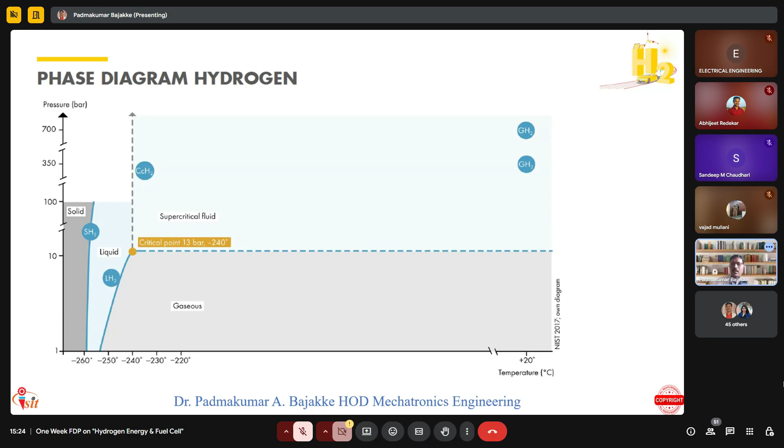That critical point is at 13 bar and minus 240 degree Celsius. With this you might have got a fair idea of at what temperature and pressure we can store hydrogen. This slide correlates with the storage capacity of hydrogen at different ambient temperatures, and storage also has a lot of challenges. To link that, my initial explanation started with this phase diagram of hydrogen.

As we know, we have n number of materials for fuel, right from petrol, diesel, biodiesel, ethanol, propane, methane, and hydrogen. Everyone is aware that the era of pure petrol and diesel has finished. Now these fuels are blended with methane and related elements. As per central government norms, we get biodiesel, which is petrol or diesel blended with methane and related groups, depending on the percentage. Still in India we could achieve blending up to only 10%. That is why those rules were made. I'll just give some basic information.

As you are all aware, post-COVID the central government imposed that BS6 vehicles be launched and come into the market. Earlier we had BS4 vehicles, with a gap of BS5 in between. So what is the actual difference between BS4 and BS6? The first strategy the central government took was to reduce emissions due to the petrol and diesel we burn in engines. If anybody has a BS6 two-wheeler, you can see what changes have been made in the technology.

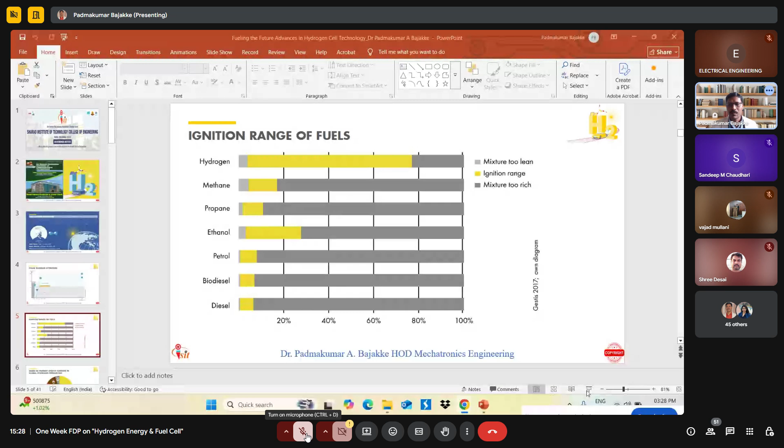Uh-huh. Hello. Yeah, sorry for the interruption.

Now the world as well as India is working on hydrogen technology, and that is the future. How to generate hydrogen from the existing materials we have is something we will discuss.

This slide relates to the ignition ranges of fuels.

Here you can find in the labeling that gray color is mixture too lean, yellow is the ignition range, and dark gray is mixture too rich, with percentages on one side of the graph at 20%, 40%, 60%, 80% and 100%. From this we can identify the ignition ranges of our existing fuels.

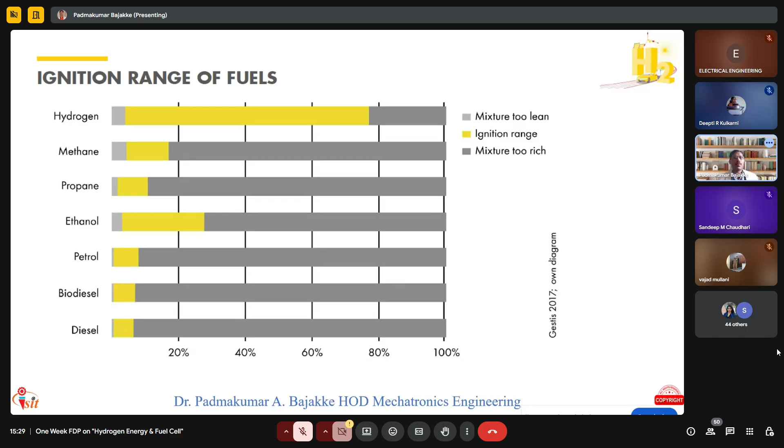Now coming to the share of primary energy carriers in global hydrogen production. In this pie chart, gas contributes 68%, oil contributes 16%, coal contributes 11%, and electricity contributes 5%. These are the primary energies required to generate hydrogen production.

Hydrogen production cannot happen by default; we have to use multiple ways, such as burning gas which helps convert water into hydrogen and oxygen molecules. Similarly, we may burn oil or burn coal, or we may use electricity. This chart represents the primary energy used in the generation of hydrogen production.

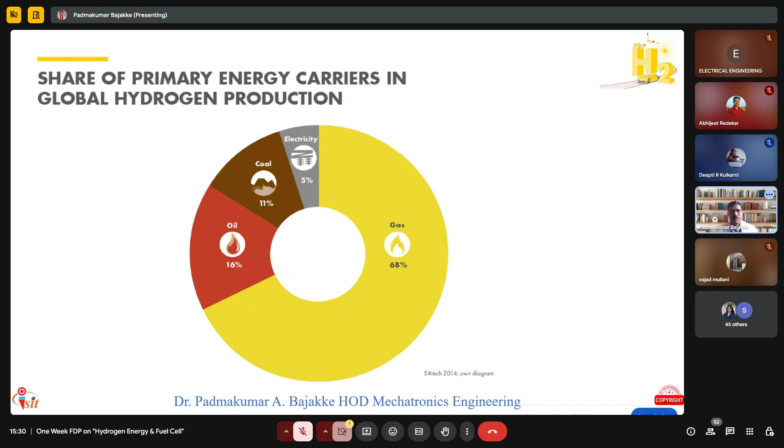Now coming to the ways or process for producing hydrogen energy. As we know, there are three types: gray hydrogen, blue hydrogen, and green hydrogen. Before 2020, the world was concentrated on gray hydrogen. After 2020, we are now in the era of generating hydrogen by blue hydrogen. After this, some countries have started their trials with green hydrogen, which may become full-fledged after 2030.

So what exactly are gray hydrogen, blue hydrogen and green hydrogen? In gray hydrogen, the primary energies we use are coal, natural gas and biomethane. After burning either of these three, it undergoes a phenomenon called reforming, which liberates a large amount of carbon dioxide. The carbon footprint is very high with gray hydrogen, which is a bad impact for the environment. Even though we are producing hydrogen, the process liberates carbon dioxide into the environment, causing the greenhouse gas effect. We cannot eliminate that.

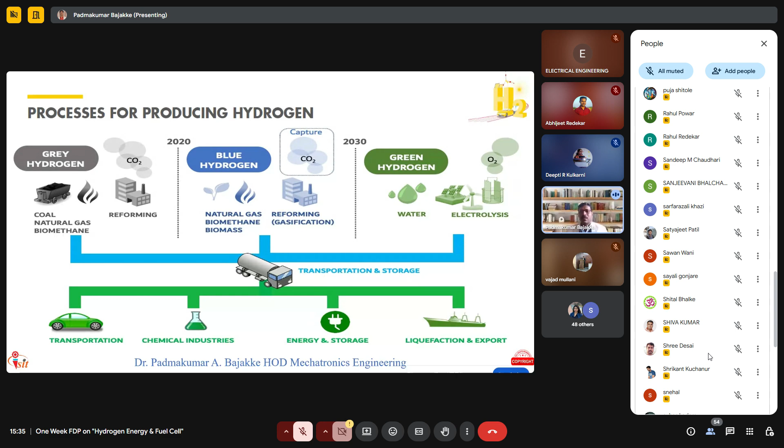Again, whatever hydrogen is generated can be used in chemical industries. A lot of chemical industries require hydrogen for their chemical operations. You might have seen hydrogen stored in a tank, which is required in some chemical industries. Again, there's energy storage - the hydrogen can be stored in the form of energy, which is nothing but fuel cells.

Next, liquefaction and export. This is the biggest challenge - how to transport hydrogen gas to other countries. That is why liquefaction is required. Storing hydrogen in gaseous form is quite dangerous. Exporting in heavy quantity goes through sea routes, which are very rich in salt content. Anything stored in high pressure, cryogenic temperature, or high temperature is very dangerous to carry through ships or sea routes. That is one of the biggest challenges of how to store it, which we will discuss again in future slides.

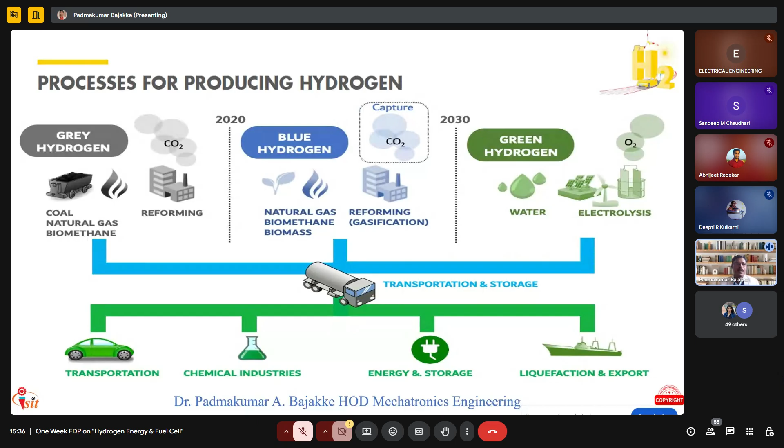Now coming to the processes for producing hydrogen, as we discussed in the earlier slide, I will elaborate on the same thing here. First you can see the primary energies, then secondary energy, conversion, then the intermediate or intermediary product, and the final energy carrier.

Now solar wind is used directly as electricity that undergoes electrolysis. So this is an example of green energy, or producing hydrogen through green energy. Here we are using solar or wind as primary sources. Whatever electricity is generated, we use as secondary energy for the process called electrolysis, to split water molecules into hydrogen and oxygen. So the final output here, we don't have any intermediate product. We directly get, after electrolysis, hydrogen and separated out oxygen molecules.

Then next we have algae from sunlight. It will undergo biochemical conversion, and again it will give an intermediate component called syngas. From the syngas, it will go through the process and give us the final output as hydrogen.

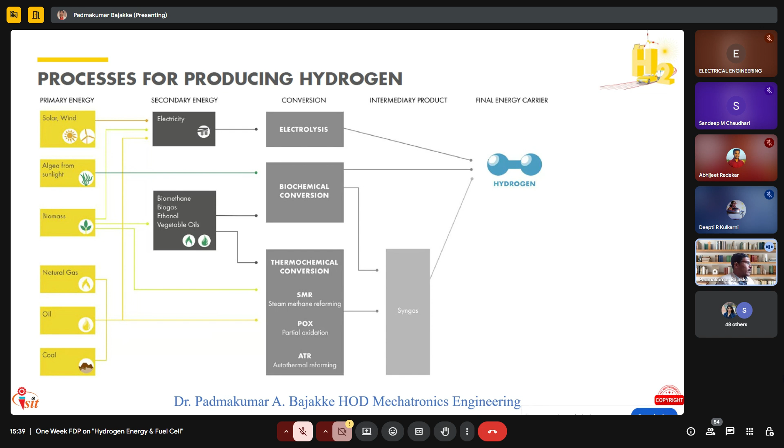Now we'll focus more on the electrolysis process, because the world is moving towards green energy, or the generation of hydrogen through green sources. As discussed in an earlier slide, one of the methods is electrolysis.

As we studied in basic chemistry, the electrolysis process has a bath, here nothing but water, and we have two electrodes, anode and cathode, dipped into the solution, with current supply given. Once the bath is processed for electrolysis, it separates out the oxygen molecules and the hydrogen molecules.

Whatever separated out oxygen and hydrogen molecules we get, we can utilize. Oxygen can be readily liberated, diverted to the atmosphere, and whatever liberated hydrogen there is, it can be stored in multiple ways.

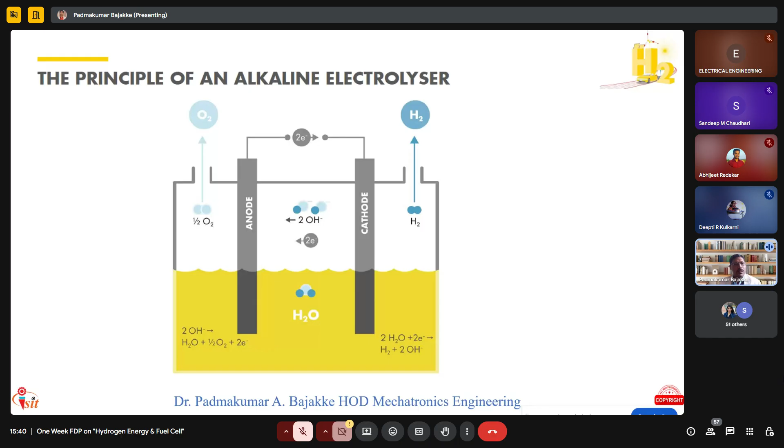Just as we have petrol pumps in our regions, in future we will get hydrogen fueling centers also. As we nowadays have battery charging stations, in a similar way in future we will also get hydrogen refilling centers.

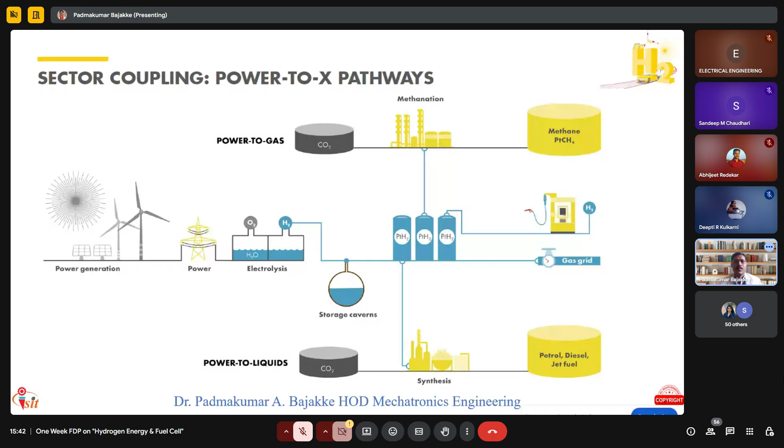Now coming to the energy input for hydrogen supply: how much energy input has to be given for the generation of hydrogen, measured in megajoule per megajoule of hydrogen generated. On the x-axis we have multiple combinations, starting with EU gas mix reforming, where you can see the labels: renewable, nuclear, and fossil. In the first one, more fossil fuel is used, a small content of nuclear, and very little renewable energy.

Then in the next one we have biogas mix reforming. Here fossil fuel use has been reduced quite a bit compared to the earlier one. Nuclear is present, and the use of renewable energy is also increased.

Then coming to LNG reforming, liquid natural gas. Here again fossil fuel usage is more, nuclear is present in some proportion, and renewable energy is very less. Whereas coming to EU electricity mix electrolysis, here fossil fuel is used as a primary source, along with nuclear energy, and to some extent renewable.

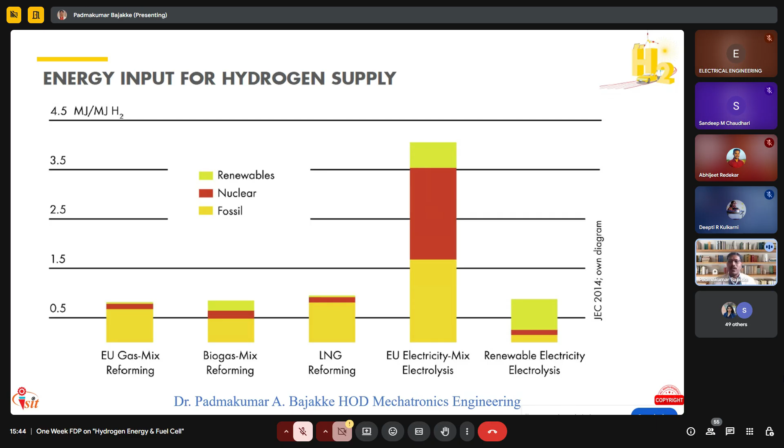In the last one, maximum we are using the renewable source of energy. Now let us understand the greenhouse gas emissions during the generation of hydrogen gas.

On the x-axis we have the same combinations of materials, and on the y-axis we have how much carbon dioxide is liberated per megajoule of hydrogen generation. Maximum it is shown up to 250 grams of carbon dioxide liberation per megajoule of hydrogen generation.

Now we'll go with the multiple combinations. The dark blue represents the centralized paths, and the light one represents decentralized paths, during generation.

First is EU gas mix reforming. For centralized hydrogen gas generation, the amount of carbon dioxide liberated is quite less, near about crossing 100 grams of carbon dioxide per megajoule of hydrogen generation. For the decentralized path, it is quite more than the centralized one, crossing somewhere around 110 or 115.

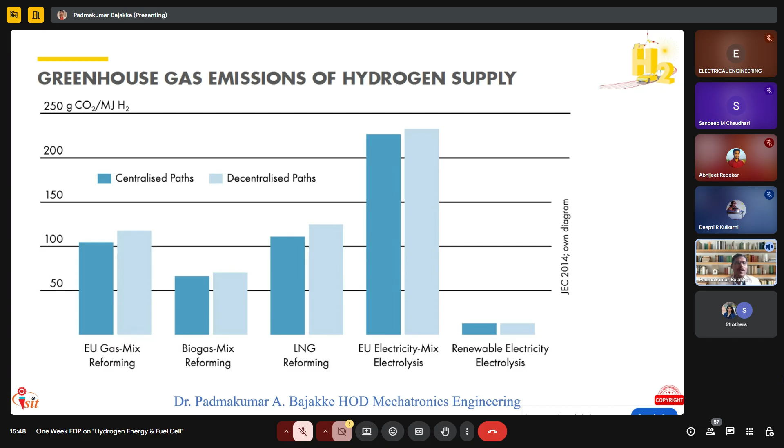These statistics are very important if you want to carry out any R&D work in this field. You should know the background, how we can generate hydrogen and how it is affecting our environment, in terms of greenhouse gas emissions.

Now coming to the production cost of hydrogen. Blue stands for current, yellow stands for projected, and the bars are error bars, showing the minimum and maximum, or you can call it standard deviation. On the y-axis we have euros per kg of hydrogen.

I repeat, it is in euros, not rupees, 12 euros per kg of hydrogen is the scale. On the other axis, we have the different methods adopted, the first being centralized gas reforming.

The current value is less than 2, and the projected value is also near to 2. There is a slight variation between both.

For decentralized gas reforming, the current value is shooting more than 4 euros per kg of hydrogen, whereas the projected value is estimated to be nearly 2.5 to 3.

With centralized electrolysis, the current value is nearly 5.8, 5.9, near to 6, and the projected value is nearly 4.2 or 4.3.

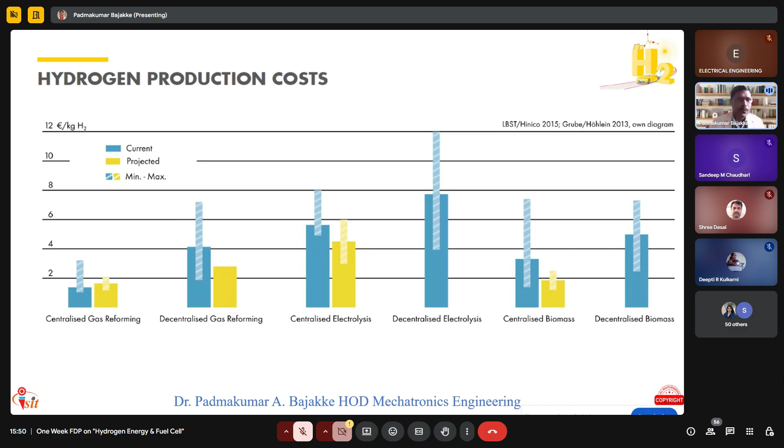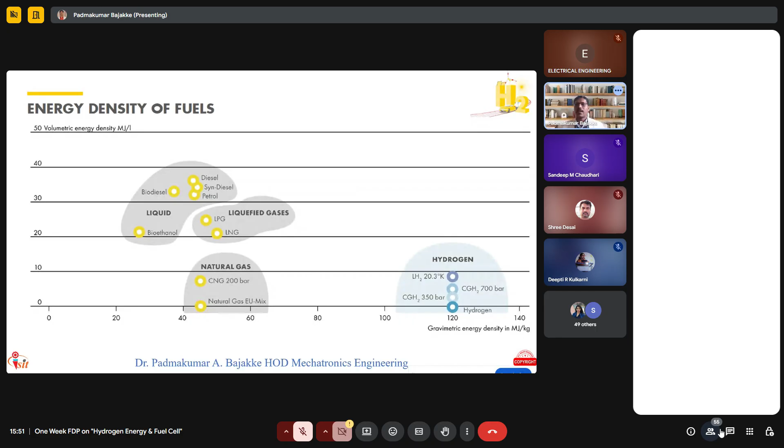So now coming to the density of fuels in different forms. Density varies with the conditions - whatever the ambient conditions, cryogenic conditions, as well as high temperature conditions. You can see three we have mapped: one is in the liquid form or liquefied gases, the natural gases, and hydrogen directly. On the y-axis you can find volumetric energy density in megajoule per liter, and on the x-axis you can find gravimetric energy density in megajoule per kg. As we have already discussed in the phase diagram...

The hydrogen can exist in solid, it can exist in liquid, and it can exist in the liquefied gases, and it can also exist directly as hydrogen gas. Now with this we can see in the liquid form whatever the bioethanol, biodiesel, and diesel with syn diesel and petrol.

So all these you can find volumetric energy density is almost for bioethanol nearly 20, and for biodiesel and other things it is more than 30. Coming to the liquefied gases, LNG is nearly 20, and LPG is nearly about 25. When it comes to natural gas, that is EU mix, it is 0 on the y-axis, and for CNG at 200 bar, it is nearly about less than 10, you can consider around 7 to 8.

Then coming to direct hydrogen storage, again you can see some combinations are shown. Liquid hydrogen at a temperature of 20.3 Kelvin - it is nearly about 9 you can consider. One more is compressed gas hydrogen at 700 bar, so its density again decreased. Compressed gas hydrogen at 350 bar is again slightly reduced, and hydrogen gas alone is just 0.

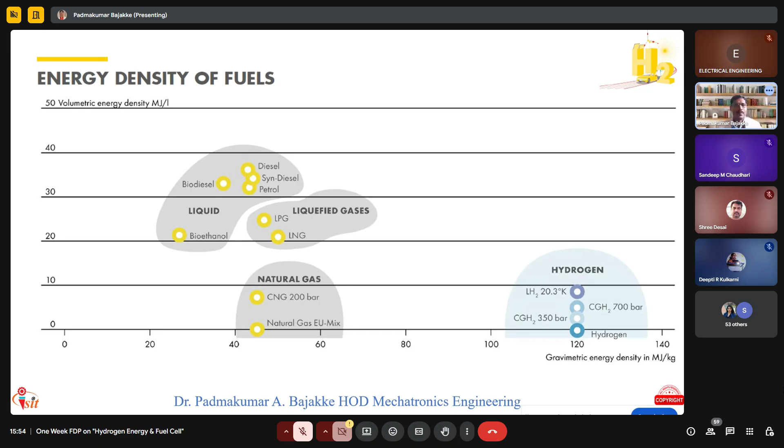Now coming to the hydrogen storage methods. The first one is compressed gaseous hydrogen, in the range of 350 to 700 bars. Next is cryocompressed hydrogen, then liquefied hydrogen. Again we have slush hydrogen and metal hydrides, liquid organic hydrogen carriers, and sorbents - in the form of nanotubes, zeolites, or MOFs. It can be present in multiple forms. These are some storage methods - four types falling under physical, and the other three falling into material based.

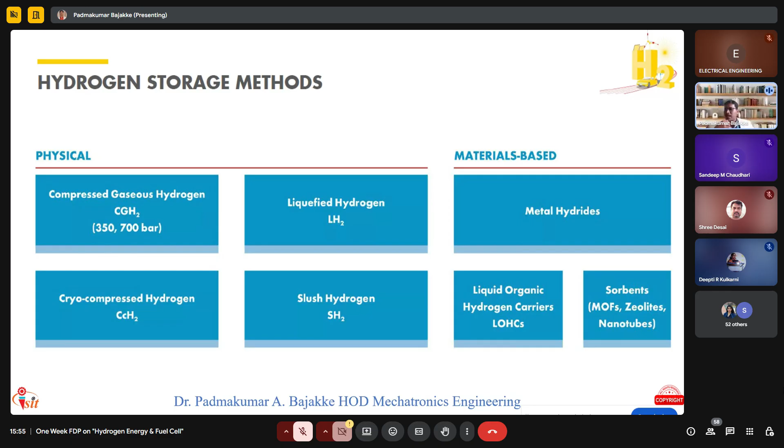Now coming to the hydrogen storage density, as we already discussed with the phase diagram and in earlier slides, as temperature and pressure vary, we can alter the amount of hydrogen that can be stored. On the x-axis the ambient temperature conditions or pressure conditions are reflected. On the y-axis you can find grams per liter of hydrogen storage. Maximum it is mapped to 100 grams per liter.

First one we have discussed is compressed gaseous hydrogen, at a temperature of 15 degrees Celsius and 350 bars. 15 degrees Celsius is considered the ambient temperature. Here we can store up to some value crossing 20, we can consider 20 to 25 in that range.

Now if I change the pressure from 350 bar to 700 bar, again we can vary the percentage of hydrogen we can store. It has doubled up - the value has doubled from 350 bars to 700 bars. Earlier it was more than 20, nearly 22 or 23, whereas with 700 bar, just changing the pressure, it has shot to double, that is nearly more than 40 or nearly 41.

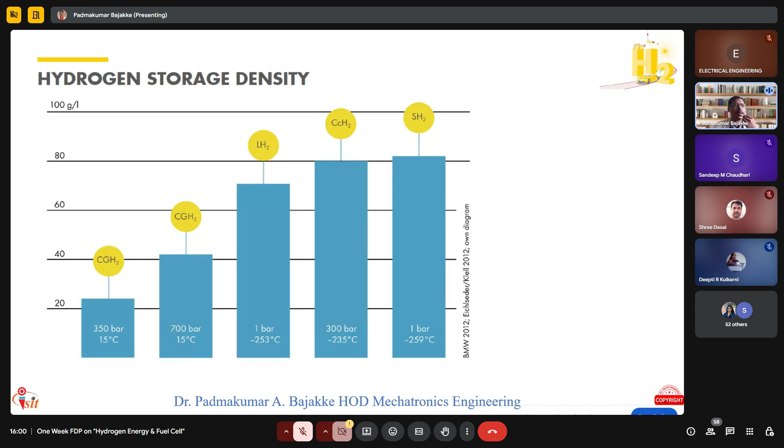Now coming to the storage density of tank systems. On the x-axis you can find the materials: petrol, FCEV, and BEV. On the y-axis you can find megajoules per kg, marked up to a maximum of 35 megajoules.

Petrol takes up nearly 30 to 33 megajoules per kg storage density of tanks in systems like our two-wheelers and four-wheelers. Every two-wheeler and four-wheeler has a capacity, like 15 liters, 40 liters, or 50 liters—that's the calculation for how petrol is stored. Next, FCEV is nearly about 9 megajoules per kg. Then battery electric vehicles are very low, nearly 1 or 2 megajoules per kg of storage.

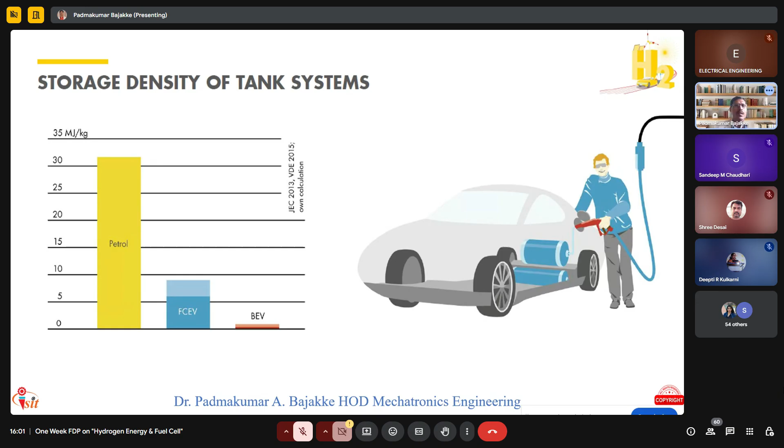Now coming to the major challenges we face in storage of hydrogen for transportation. Here I've again taken the example of ambient temperature and cryogenic temperature, to show how temperature conditions vary while storing hydrogen. In the first container, you can see tube trailers having cylinders. At 200 to 250 bar pressure, we can store nearly about 500 kg of hydrogen—that's in ambient temperature.

As discussed, ambient temperature is your normal room temperature, and pressure should be high. We've seen combinations of pressure and temperature and how they change the amount of hydrogen stored. So specifically, in ambient temperature, if I increase the pressure from 250 bar to 500 bar, almost doubled, the amount of hydrogen stored also doubles—from 500 kg to 1000 kg, again at ambient, room temperature.

Now the last one: cryogenic temperature with 1 to 4 bar pressure. As we've already discussed, cryogenic temperature refers to whatever minus degree Celsius temperatures, and here we need not require high pressure.

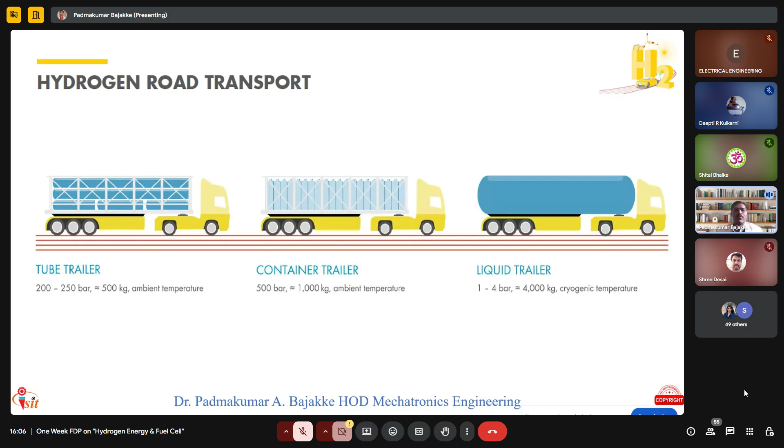As I have discussed, this combination is very dangerous to transport through sea routes. As we have very saline water, that is water with high content of salt, that is very dangerous. So that is about how we can transport hydrogen. You might have seen most of it transported either in tanks, cylinders, or containers. What people are preferring for transport, maximum we are transporting by roadways, right?

So now coming to hydrogen pipelines, what countries are having in multiple countries. If you take the USA, it is having 2,608 kilometers of hydrogen pipelines. It may be right from the generation plant to disbursement to the consumers, or it may be to the intermediate dealers or whatever stations. So it is the maximum connection we can find in the USA. The next ones are Belgium, Germany, France, Netherlands, Canada, and all other countries together total 258 kilometers.

So now we can map India in the others because we are still in the R&D stage. India is not yet fully working on hydrogen, we are still in the hydrogen R&D conditions. You might have seen recently the Indian government, the railway ministry, has launched the green hydrogen locomotive, that is train. Very soon it will be prototype. One prototype will be launched first. Depending upon its loopholes or whatever, again sophisticated, multiple locomotives we can get. So that is in the train. Again, India, as I gave an example of Toyota, which has launched one of its green hydrogen automotives. So India is still in the R&D, research and development activities. That is where we stand.

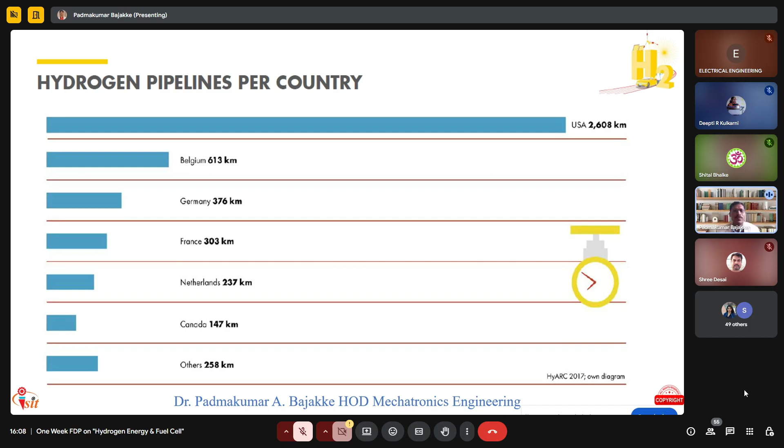Now coming to the global usage of hydrogen. In what all forms hydrogen is being utilized: highest is ammonia 55%, refining sectors 25%, other sectors 10%, methanol 10%. So in all these sectors hydrogen is being used. For the generation of ammonia it is highest, then refining sectors, other sectors, and methanol sectors for the usage of hydrogen.

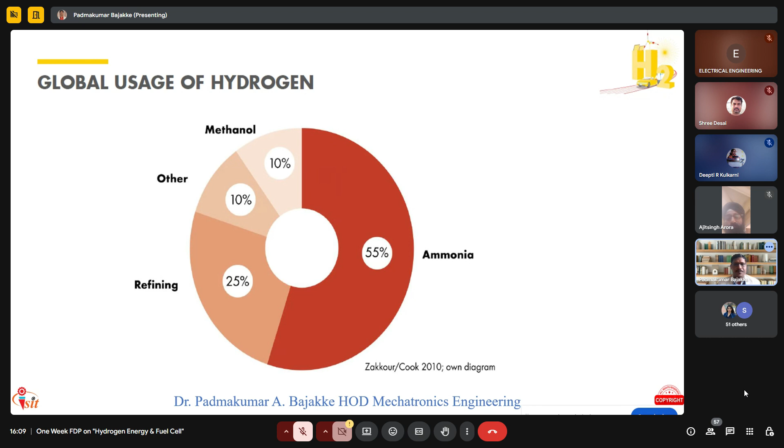Now again I have shown the principle of the fuel cell. Coming to the transportation sector, hydrogen has to be stored in the form of some fuel cell. Whatever electrical vehicles, the energy is stored in the battery. In the similar way, whatever hydrogen is there, it has to be stored in the form of the fuel cell.

So nowadays you can find the vehicles. I'll give the example of electrical vehicles, where energy is stored in the form of a battery. Whenever the vehicle is in the start condition, it needs recharging; otherwise it is totally drained, and you put it for charging.

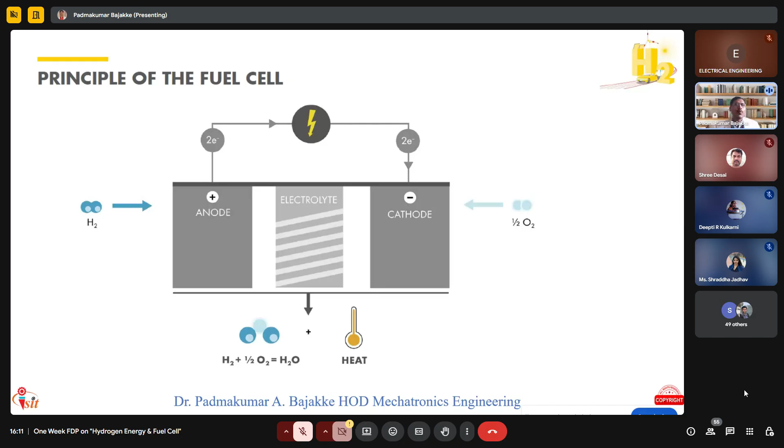Here, whatever the vehicles should have fuel cells, multiple fuel cells stacked in a series, so that you can couple the total amount of energy, right? So that is the principle behind the fuel cell.

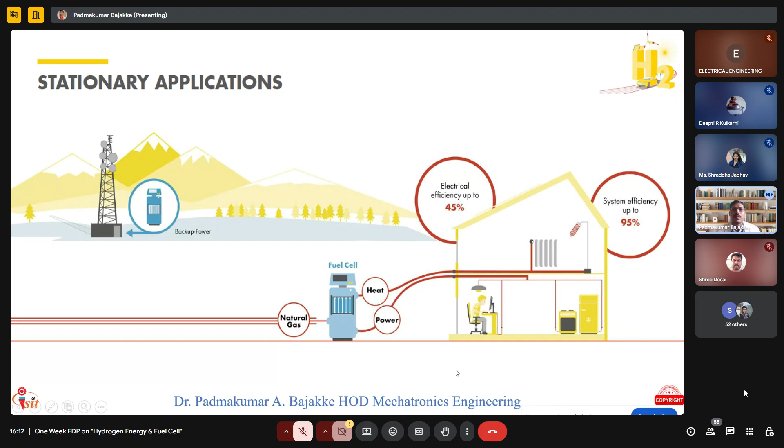Now coming to stationary applications, how we can store and use the fuel cell. At present, in all areas we have petrol pumps, which are nowadays being replaced by electrical charging stations. So in future you will also get refill stations for hydrogen energy. That is one thing I've shown, the fuel cell, which is nothing but a refilling cell using natural gas to get heat and power. If used for electrical efficiency, it's up to 45%; for system efficiency it's up to 95%. So that shows how we can use hydrogen in different sectors.

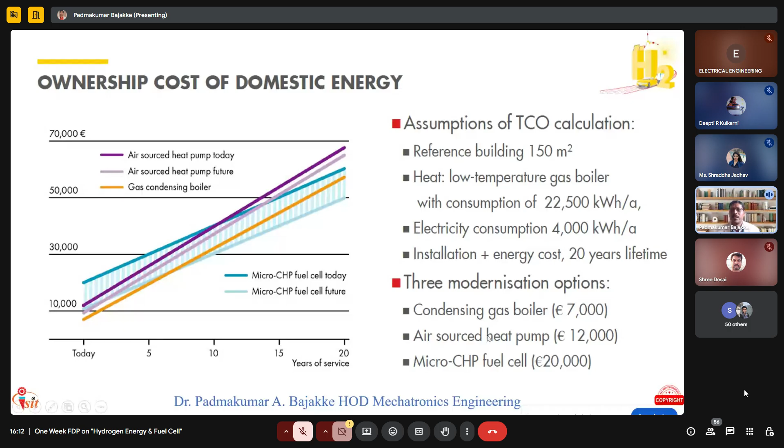Now coming to the technology readiness of hydrogen applications, called TRL, technology readiness level, of hydrogen application. It is mapped or given a rating from 1 to 9, where 1 is minimum and 9 is highest. TRL level 1 means it is in the research and development stage; TRL level 9 means it is fully working. I repeat, TRL level 1 means that sector is in research and development, and TRL level 9 means that sector is fully in working condition.

You can see the space sector is mapped to TRL level 9, industrial trucks 8 to 9, stationary applications 8 to 9, passenger cars 8, buses 7 to 8, light rail 7, shunting locomotives 6 to 7, motorcycles 6 to 7, lorries and trucks 6 to 7, aviation 5 to 6, and shipping 5 to 6. As I said, TRL level 1 means R&D, 9 means fully used, meaning it's fully used in space, industry trucks, and stationary applications. As with the example of Toyota, which launched its hydrogen car and is now working on buses, and India has already launched one prototype locomotive, which is still mapped to 7. The rest are in the range of 6, and maximum 5 to 6 for aviation and shipping.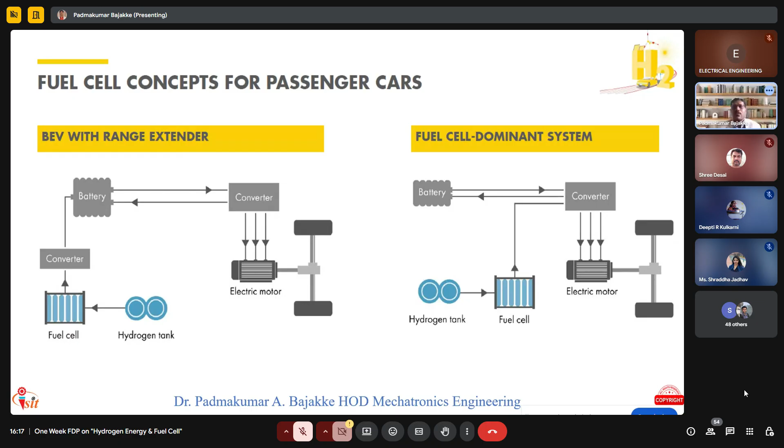This is a concept of how industries are working to generate fuel cell technology in automobiles. Don't confuse this with electrical vehicles and hydrogen powered vehicles. In electrical vehicles, you are charging the battery and powering the vehicle. In hydrogen technology vehicles, fuel cells are responsible for the electrolysis process. A hydrogen tank supplies the fuel cell and converter, energy is stored in the battery, and then you power the electric motor to drive the vehicle. This is the difference between electrical vehicles and fuel cell, that is hydrogen dominant systems.

Now coming to the fuel cost comparison. Here you can find hydrogen, petrol, and electricity on the x-axis. On the y-axis you can find cost in euros per megajoule.

Now for hydrogen, you can see it is 7 euros per kg, reaching up to a maximum of 9.5 euros per kg. Whereas petrol is in the range of 1.5 to 2.5 euros per liter, and electricity is 20 to 35 cents per kilowatt hour. This is now mapped with present technology, that is fuel cell electric vehicles, petrol, hybrid petrol, and battery electric vehicles.

You can see for fuel cell electric vehicles, the amount is reduced. In the earlier graph it was around 7 to 9 euros per kg; here it is almost in the range of 4 to 6 if we adopt fuel cell electric vehicles. For petrol, it is in the range of nearly 9 to more than 12, near 15. For hybrid petrol, because of the addition of methane groups instead of 100% petrol, blending reduces the cost, which is in the range of 6 to 9 plus or minus. And for battery powered electric vehicles, it is in the range of 3 to 6 nearly.

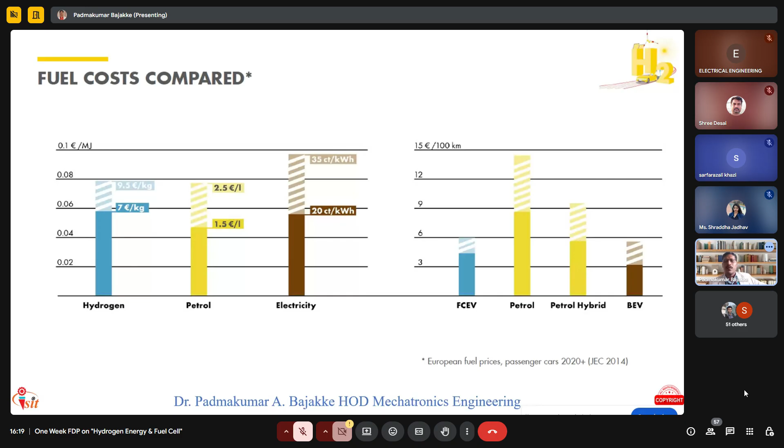So this is the comparison cost of fuels - whatever conventional fuel we have, electricity we have, hydrogen, and fuel cell electric vehicles.

Now this is the ownership cost. You can find three lines: the dotted line is fuel cell vehicles. In 2010, it was costing like 9.5 euros per kg of hydrogen, and in 2020 you can see the lighter straight line below, fuel cell electric vehicles, the 9.5 has dropped down to 7 euros per kg of hydrogen. As there is advancement in technology, the cost of 9.5 euros has reduced to 7.

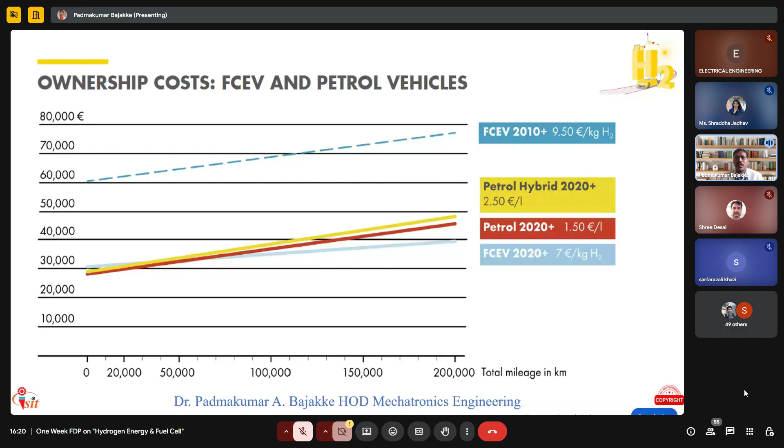Next, petrol: normal petrol is costing about 1.5 euros per liter. The blended petrol, that is hybrid petrol, is costing nowadays around 2.5 euros per liter.

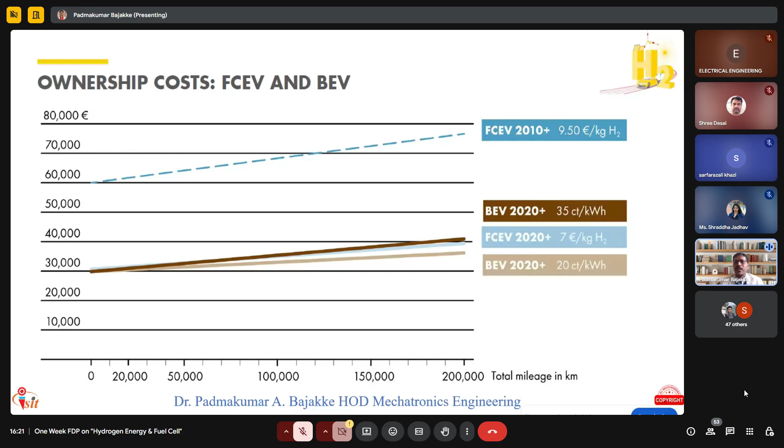In the similar way, for ownership cost of fuel cell electric vehicles and battery electric vehicles: for fuel cell electric vehicles, in 2010 it was 9.5 euros per kg of hydrogen, and from 2020 onwards it has reduced to 7 euros per kg of hydrogen. And for battery electric vehicles, it is 35 cents per kilowatt hour, reduced to 20 cents per kilowatt hour.

Now, worldwide, how it is mapped - that is hydrogen infrastructure activities. You can see in the maps that different countries have been mapped: USA, global, India also mapped, China, Korea, and other countries are also mapped with hydrogen infrastructure developing activities.

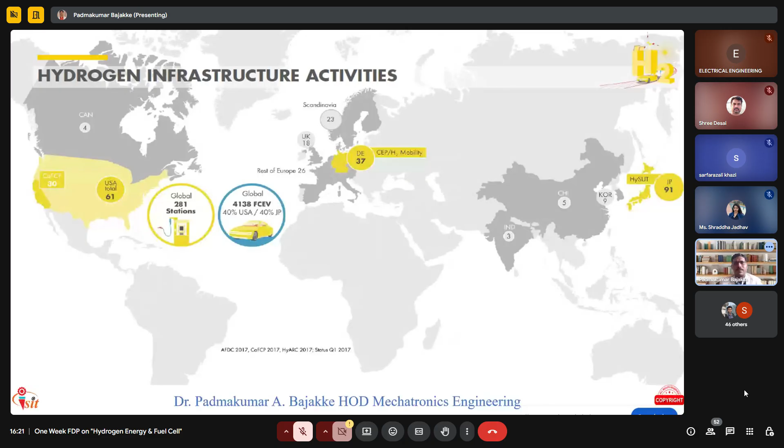Now coming to the components of a hydrogen refueling station. As I said, presently we have petrol pumps or petrol and diesel refilling centers either on highways or in local areas. In the present era, we even have electrical vehicle charging stations in all different locations. So in future also you'll get hydrogen refilling centers.

In that, again we have two types: one is upstream, wherein electrolysis is the dominant process, and the second is how we can convert that into the refilling station.

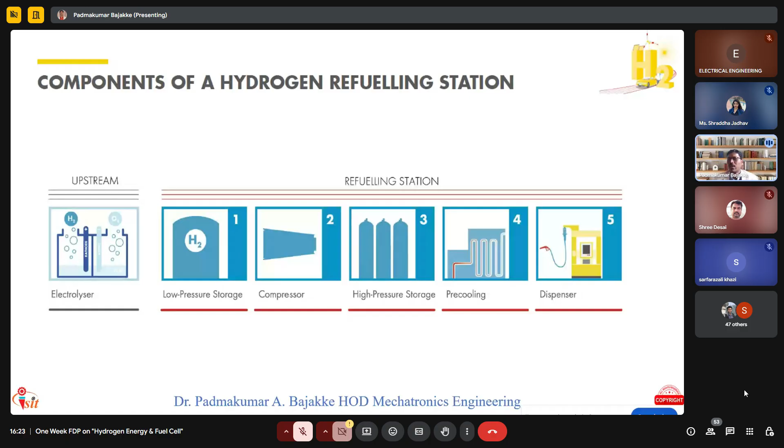So whatever the output of electrolysis, the hydrogen that is separated, is first stored in low pressure storage. Then it is compressed to increase its pressure and stored in high pressure storage. Once compressed, before dispensing it is pre-cooled, and finally it is dispensed to the vehicles. So these are the components involved if you want to install a hydrogen refilling station.

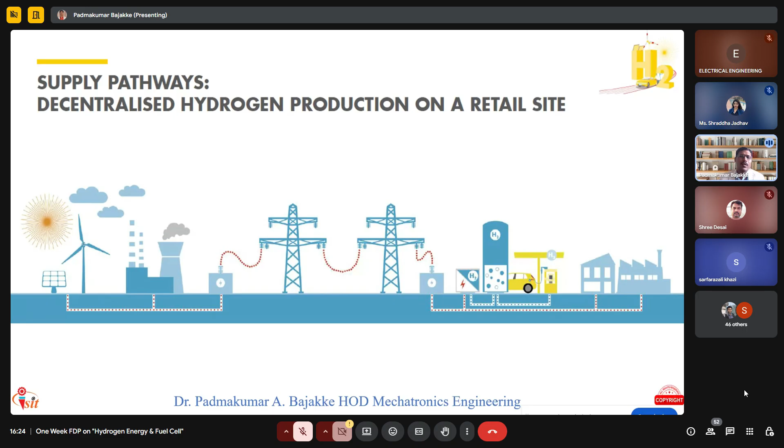Now, supply pathways: decentralized hydrogen production on a retail site. If you want a hydrogen refilling station, decentralized production means you generate hydrogen on your own at the same place and dispense it there too, from production to dispensing in a single place. Centralized means the hydrogen is generated somewhere else and brought to your refueling station. Generation is centralized and then dispersed to your station, whereas decentralized means right from generation to final dispensing to the vehicles, it is under a single roof.

Now what are the levels of hydrogen refilling stations? Just like if you take any brand giving franchisees, the franchisees are in different cadres - A grade, B grade, C grade, D grade. In a similar way, hydrogen refilling stations are categorized depending upon their size.

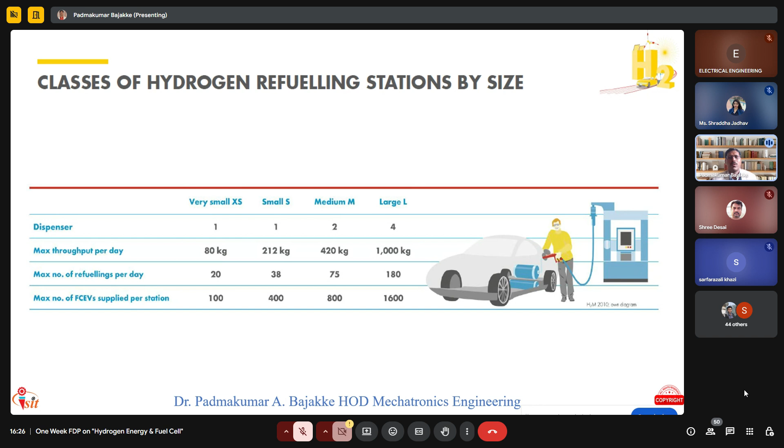There is very small (XS), small (S), medium (M), and large (L) size. The dispenser capacity for small and very small is 1, medium is 2, and large is 4. The maximum output per day: for very small it is 80 kg, small can dispense up to 212 kg, medium up to 420 kg, and large up to 1000 kg. The maximum number of refillings per day: 20, 38, 75, and 180. As the size of the station increases, the values increase, and the maximum number of fuel cell vehicles supplied per station ranges from 100-400, 400-800, to 800-1600. So this depends on what size of hydrogen refilling station you want to take, and your capacity increases accordingly.

Now coming to specific well-to-wheel passenger car greenhouse gas emissions in real world driving conditions, taking an example from Europe. There are four segments: petrol, hybrid, battery electric vehicles, and fuel cell electric vehicles, plotted against grams of carbon dioxide emission per kilometer of vehicle travel. From 2020 as we pass on to 2050, you can find the tank-to-wheel and well-to-tank values. Well-to-wheel means right from how we generate petrol or diesel - digging from the petrol well, refining the crude oil, segregating petrol and diesel - to the wheels.

In petrol hybrid, emissions are reduced because we are blending ethanol groups, that is biopetrols. In battery electric vehicles, you can see the values from 2020 to 2050 - in future it is going to drastically reduce. And in fuel cell electric vehicles, from today through 2030 to 2040, predicted up to 2050, the graph is in a declining or decreasing form. The carbon dioxide emission will be brought nearly to zero if we adopt fuel cell electric vehicles. Once again, if we adopt fuel cell electric vehicles, we can bring down the carbon dioxide footprint to the environment, reducing greenhouse gas emissions, which is the motto of the world working on hydrogen generation.

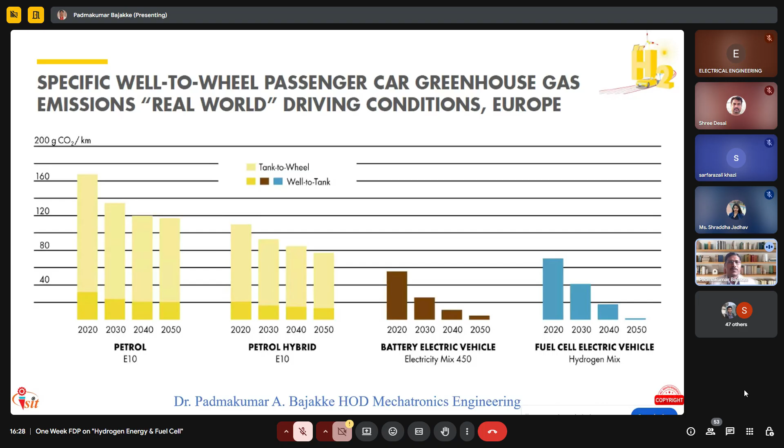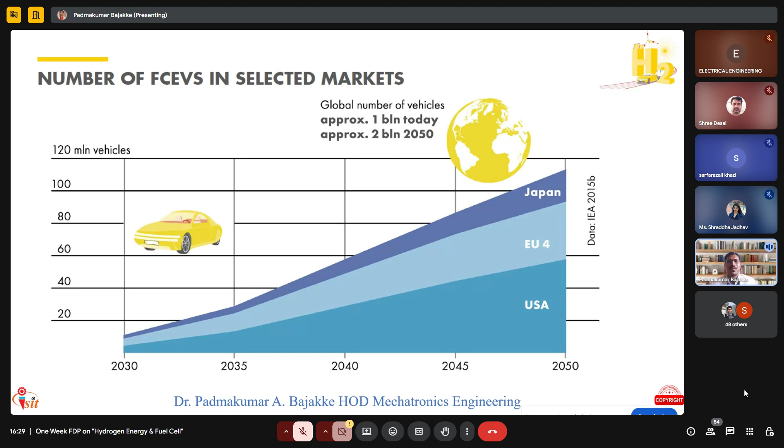So again you can see the number of fuel cell electric vehicles in the market. Globally, the number of vehicles is approximately 1 billion today, and it will reach up to 2 billion by the year 2050. We can see Japan is leading the race, the next one Europe, then the USA. On the x-axis you have years, and on the y-axis millions of vehicles, maximum 120 million. So Japan is leading the race, then Europe and the USA.

Then the same trend, if mapped with the new registration of fuel cell electric vehicles in the market, on the x-axis you have the years from 2025 to predicted up to 2050, and on the y-axis you have millions of vehicles, maximum mapped up to 10 million. So in this also the trend is the same: Japan is leading the race, then Europe and the USA.

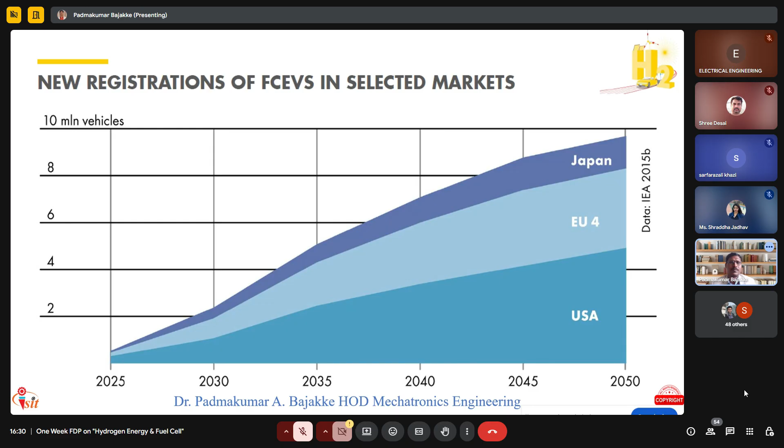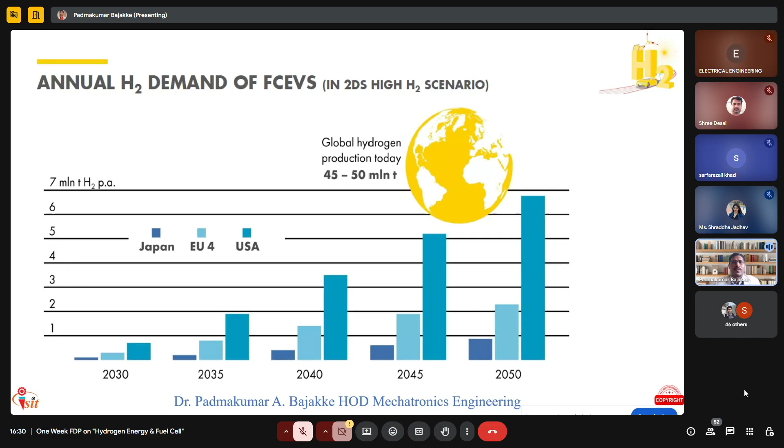Then coming to the annual hydrogen demand for fuel cell electric vehicles: how much demand we have and how much is predicted in future years. Global hydrogen production today is around 45 to 50 million tons required. On the x-axis we have the years, on the y-axis we have up to 7 million tons maximum hydrogen per annum. Here multiple countries are mapped: Japan, Europe, and the USA. So as the years increase, the number of vehicles will increase, and the consumption of hydrogen will also increase. That is the trend shown in this graph.

Then the next one: well-to-wheel CO2 savings of fuel cell electric vehicles compared to petrol vehicles. The trend is shown with years on the x-axis, and on the y-axis, million tons of carbon dioxide. This shows how much carbon dioxide is generated right from refining to when it's brought to consumers on the wheel. Again, the same countries have been chosen for this trend.

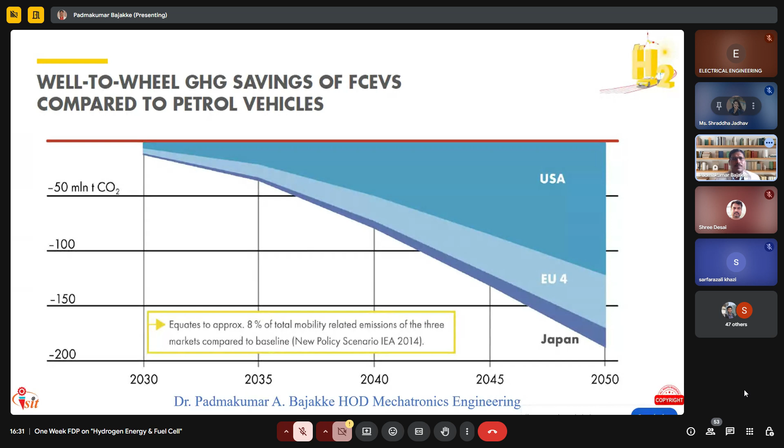So now, what are the policies that the hydrogen economy asks for? First is the production process, which includes cost, efficiency, and flexibility. The next one is fuel cells: again, what is the cost, efficiency, and stability. In the production process, how much cost is involved, how efficient the process is, and how flexible the process is for generation of hydrogen energy. For fuel cells, how we can generate them, what is the incurred cost, what is the efficiency, and what is the stability of the fuel cells.

Till today we don't really know, since many people are using battery-powered vehicles, the life of a battery - whether it will last 5 years, 10 years, 15 years. So again here, for the fuel cells, the stability is an unmapped area.

Then long-term mass storage, and R&D in materials-based storage - this is again a challenge. What material has to be used in the storage, so that it will not cause any accidents.

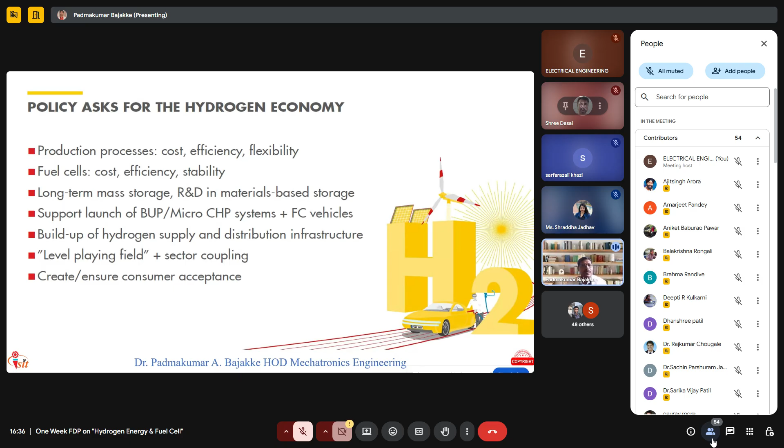Okay, so again we have discussed how to build the infrastructure. I have discussed that infrastructure can be built in two ways - centralized and decentralized ways. That is related to infrastructure. As we have petrol pumps, they are being replaced or parallelly we have electric recharging stations. Again, in future, hydrogen refilling stations will also come into picture. That is all about how to build the infrastructure, whether in India or abroad, how we can develop it.

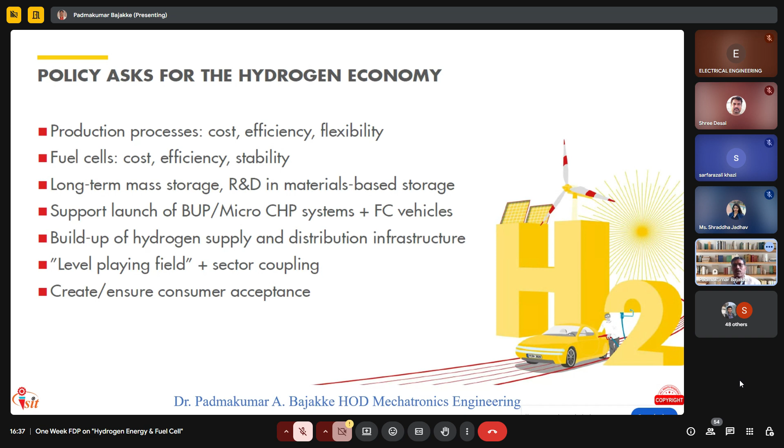So again coming to the challenges, as I have discussed, storing is the biggest challenge - storing the hydrogen is one of the biggest challenges. So that is all I can convey for today's session.

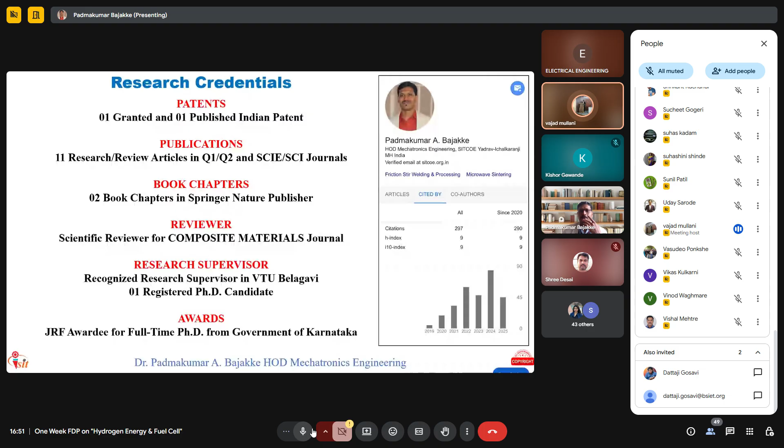Okay sir, thank you. Are there any more questions, or shall we conclude today's session?